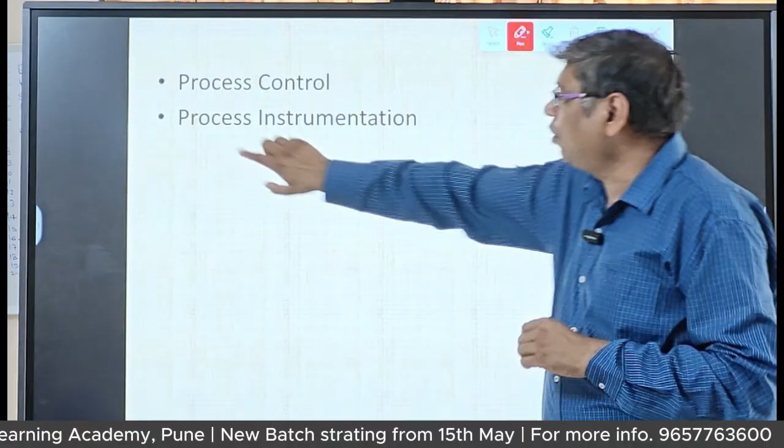Now, important point. This slide is very important because instrumentation has two parts. First, we will start from the process instrumentation.

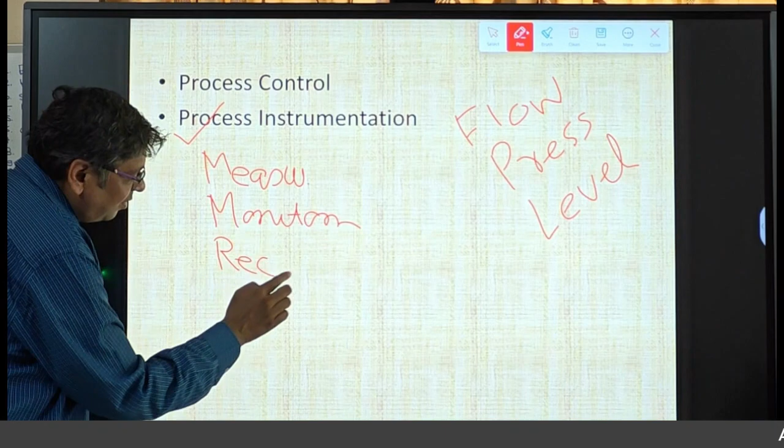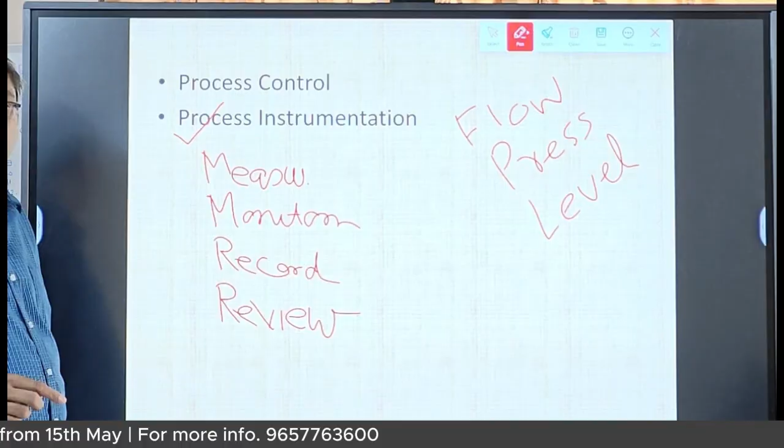Here in process instrumentation, you are measuring something, a particular parameter. Then you are monitoring it against its limits. Then you are recording and reviewing them, whether they are good or bad. You can also check their validity. This validity word is very important when you are in the calibration or audit field.

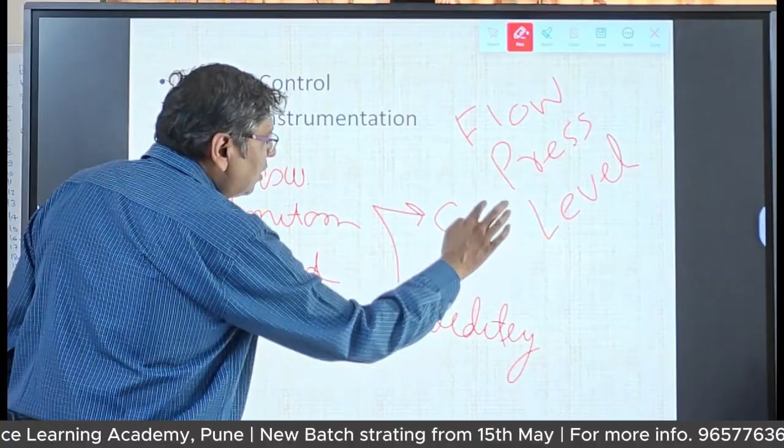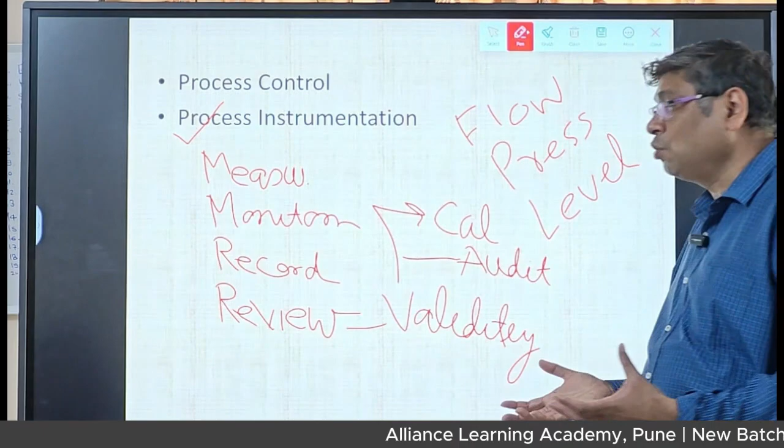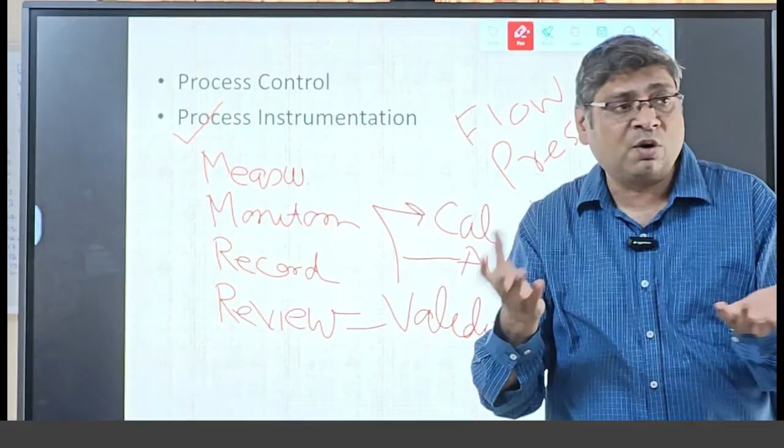Or nowadays you are becoming SCADA engineers. SCADA engineers must know whether the data coming in is right or wrong, or if it's garbage in, garbage out. If the instrumentation engineer, SCADA engineer, or PLC engineer is not able to understand whether the incoming data is right or wrong, their programming and everything will provide output that is garbage. No use, got it? So instrumentation deals with instruments.

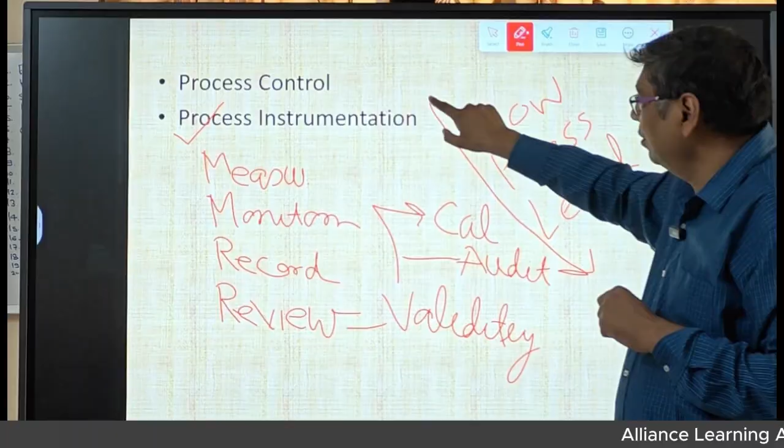Can you tell me at least 15 parameters today? First is flow, temperature. Third, pressure, very good, level. Okay, vibration, turbidity, density, velocity.

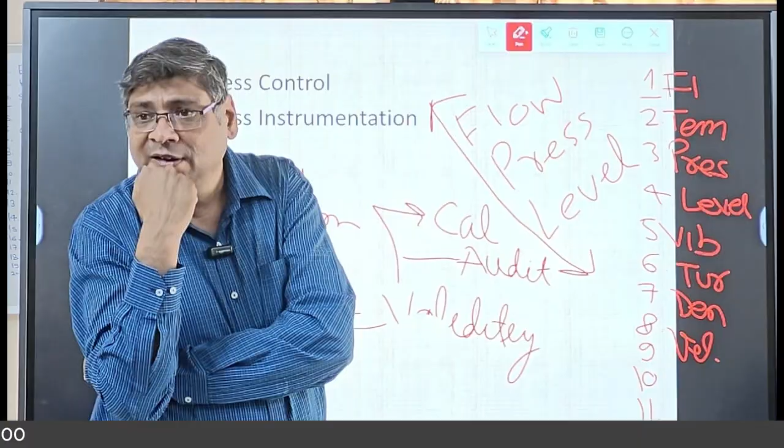pH, we can say pH. How much is the pH of water? Drinking water, what is the pH of drinking water? I think 7. You don't think 7, it is 7. So pH.

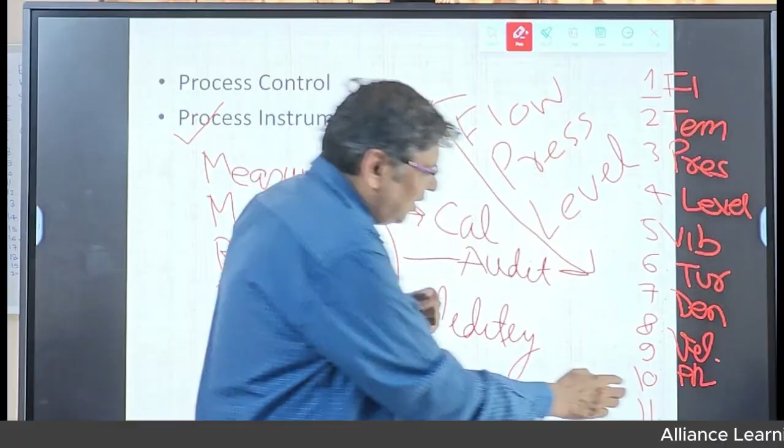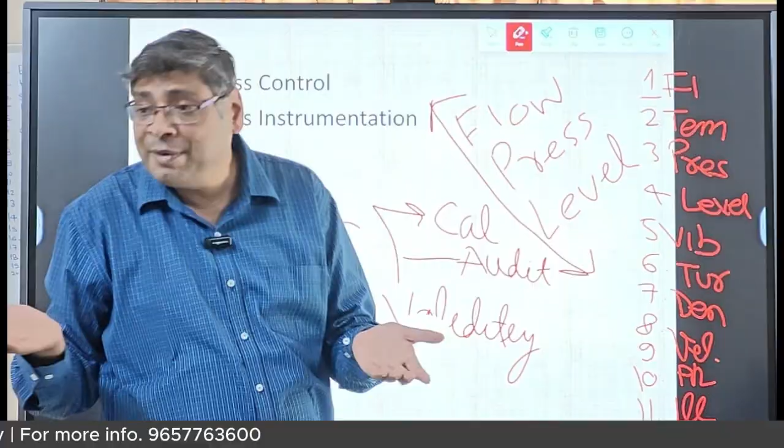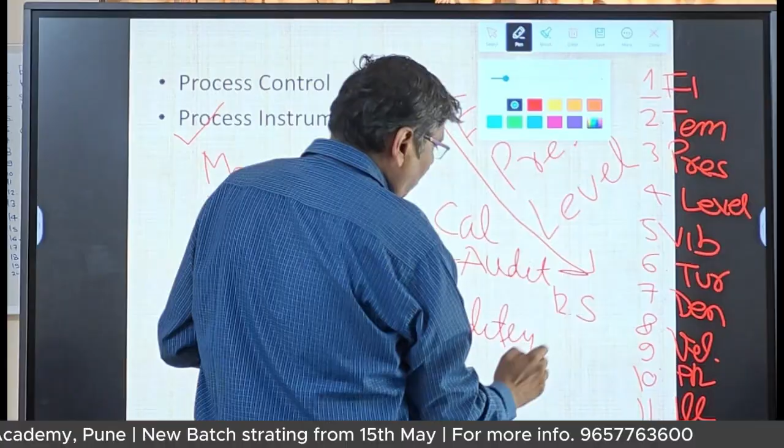Then what more? You can measure light also, luminous. Then when you see the word, something is coming on your screen, sound, dB, 120 dB. So you can say the 12th parameter is sound. I will just change the color so you will understand. Okay, what is 13? Sound.

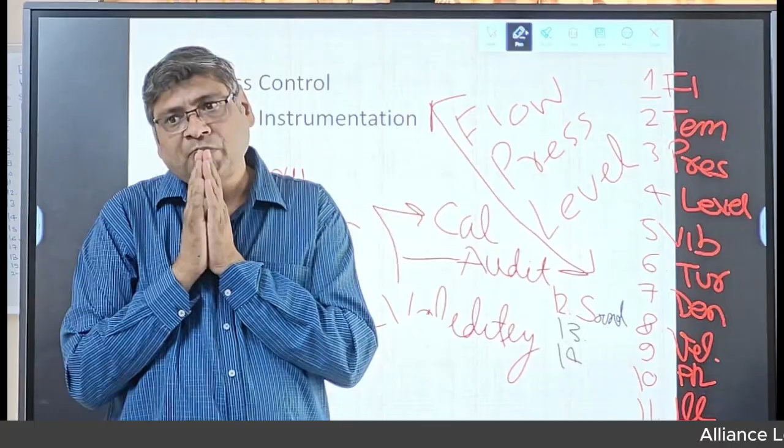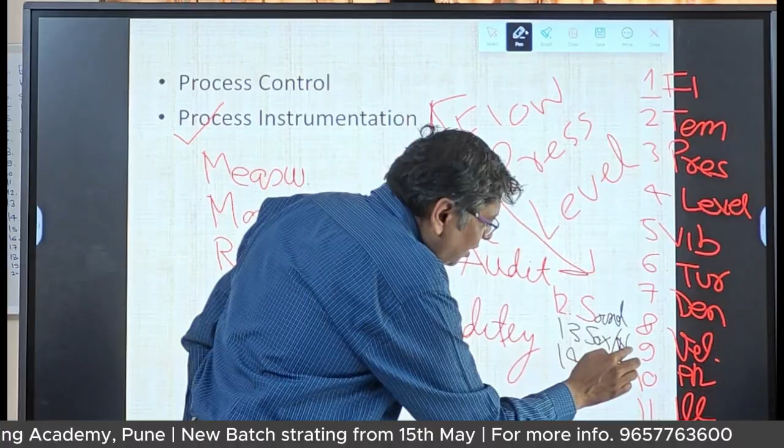These are SOx, NOx. That's the opacity, meaning how much dust is in your air. So we can say here SOx and NOx, and we can have opacity. Similarly, we say turbidity in water - how much haziness in the water is the turbidity. How much dust particle in the air is the opacity. Good air quality.

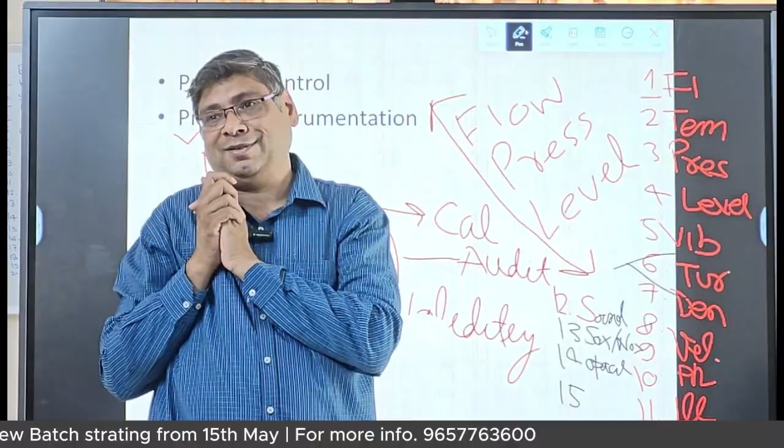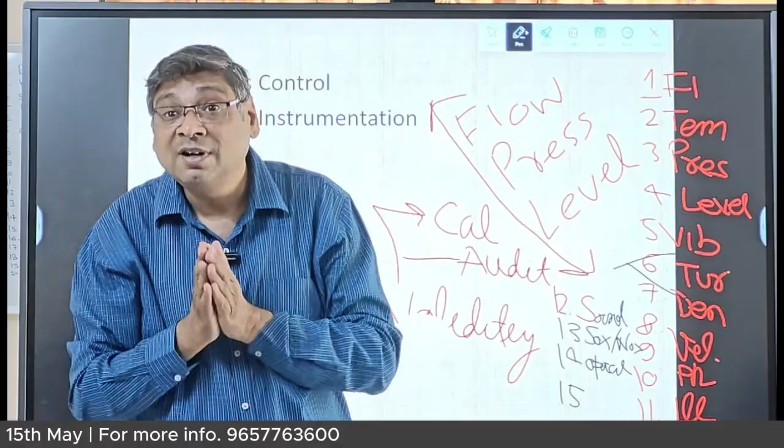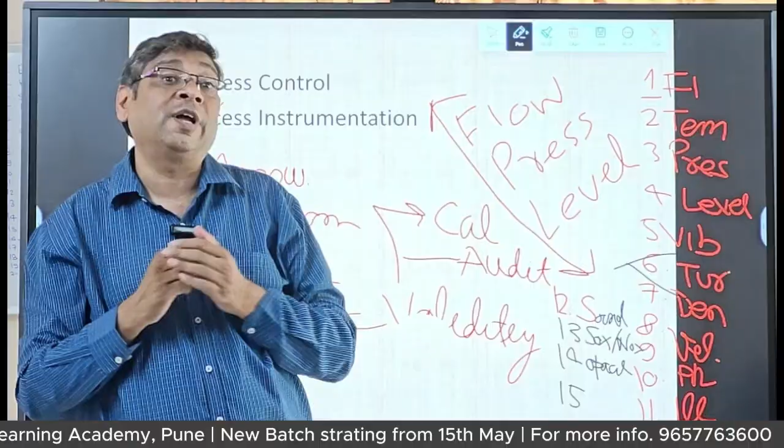Next time when you go to the roads, in the industries they have a board. That board displays how much SOx, how much NOx. In that company you can see. Nowadays they say that the pollution control board, CPCB Central Pollution Control Board, and SPCB State Pollution Control Board require you to display what is the air quality at your plant, how much wastewater, and the quality of wastewater.

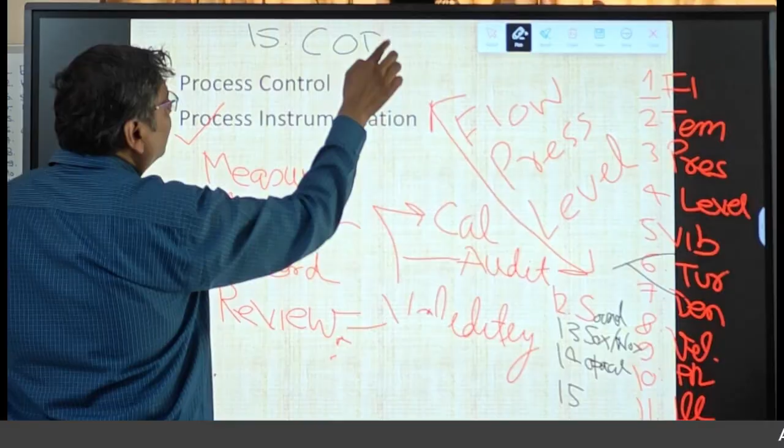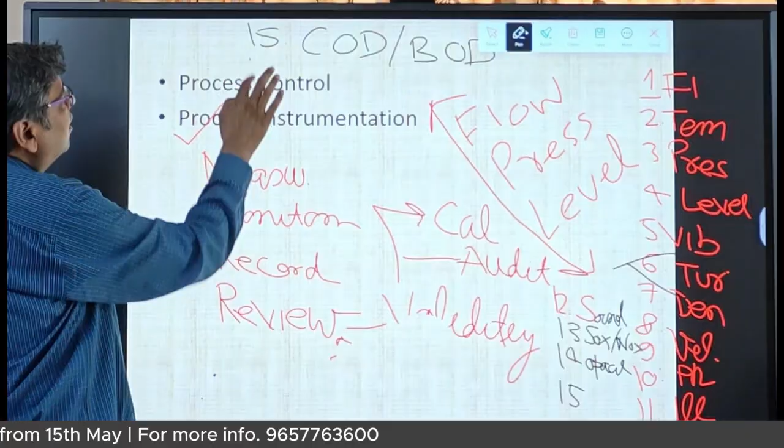Now quality of the wastewater, like air quality, has a lot of parameters. Parameter number 15 is COD, BOD - chemical oxygen demand and biological oxygen demand. Then TSS, total suspended solids. There are some more instruments, they call it 17, VOC.

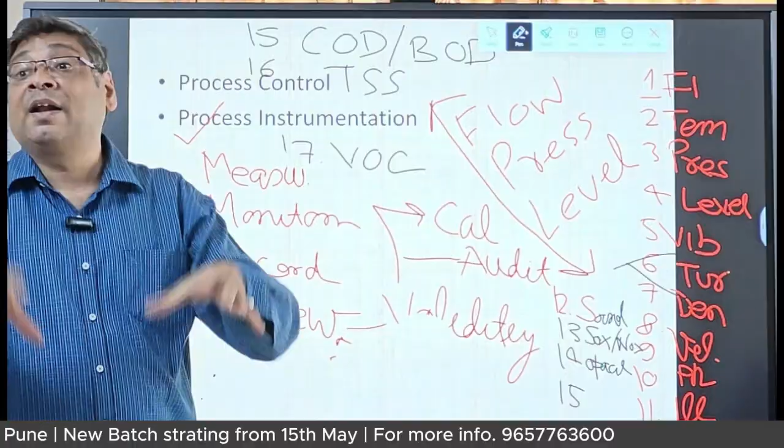Volatile compounds. And if my industry is like, for example, dealing with some metals, heavy metals, then they measure iron in the water, grease in the water. So that we also measure. There's a lot of good parameters you came up with for air quality and water quality.

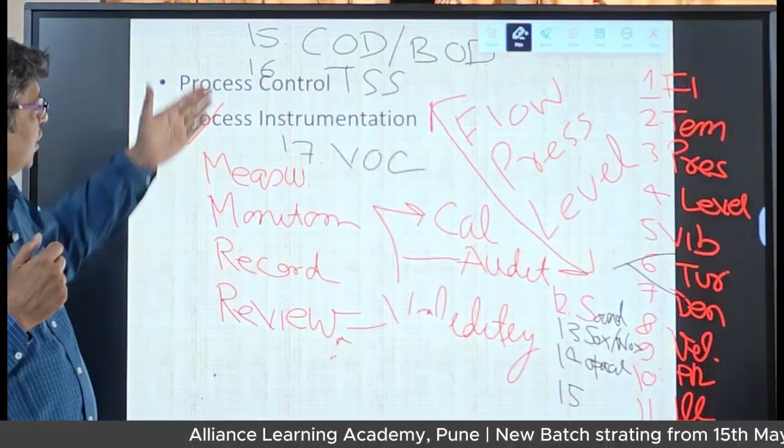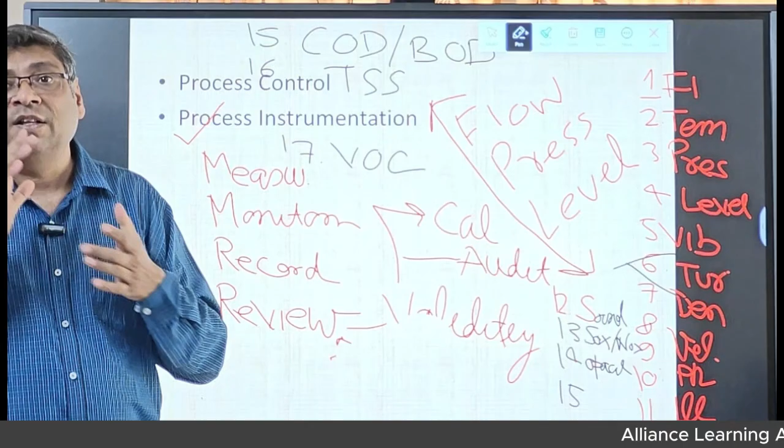So now how many is there? 16, 17. But we want to discuss only. So you can, if you want, take a photograph, or we will try to give you some notes on this. And weekly exams are based on these.

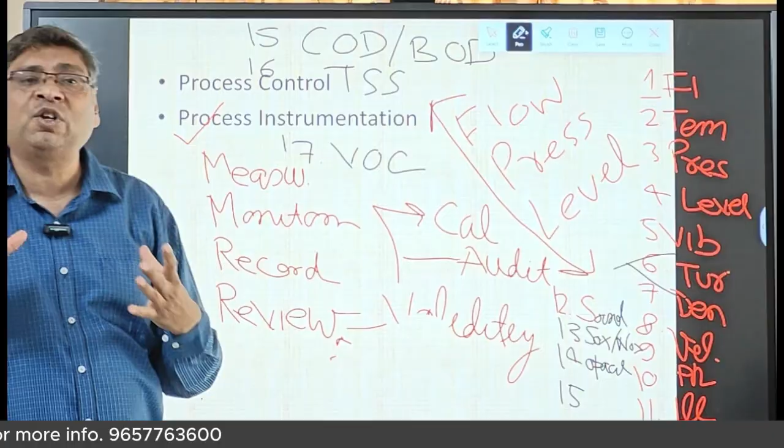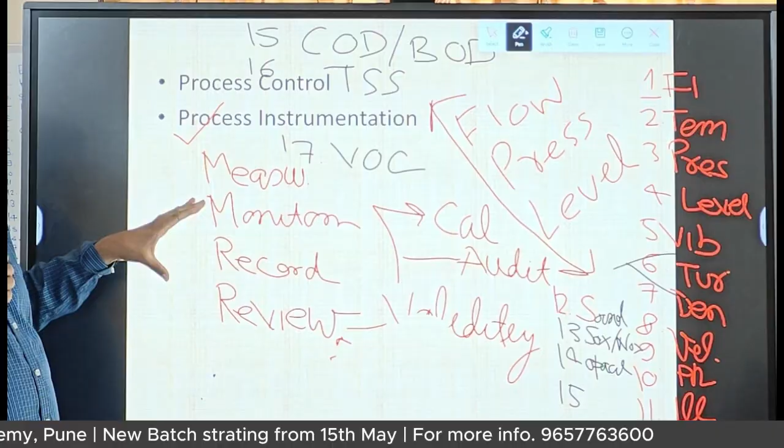So now we discussed process instrumentation. Why process instrumentation? Because we want to measure something, we want to monitor something, we want to record something, we want to review something. For that I need instruments, and that's called the instrumentation parameters.

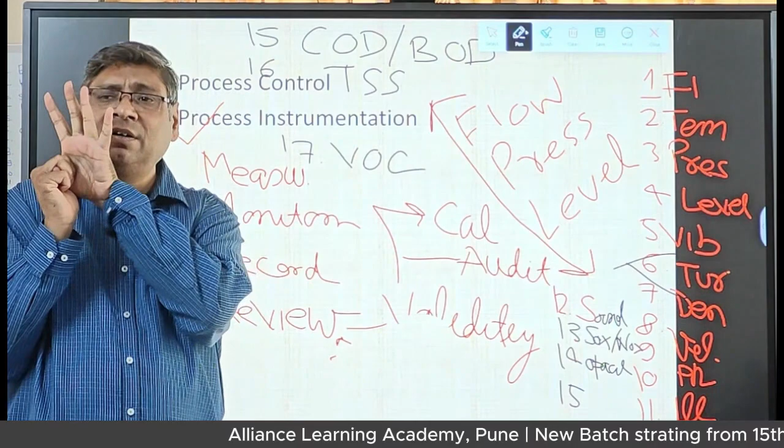Basic instrumentation parameters are how many? Basic four. And after that there are many. One day in one place, I think your college or something, they identified 75 parameters. Hello, 75 parameters! We are here on only 17.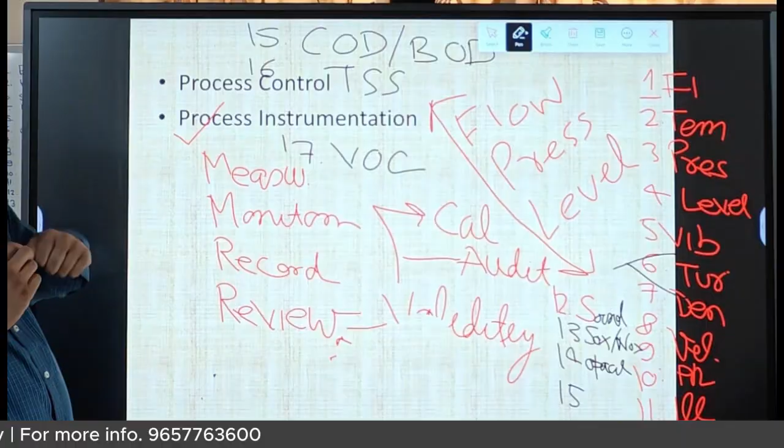Okay, now we are coming to the second part, and that part is the process control.

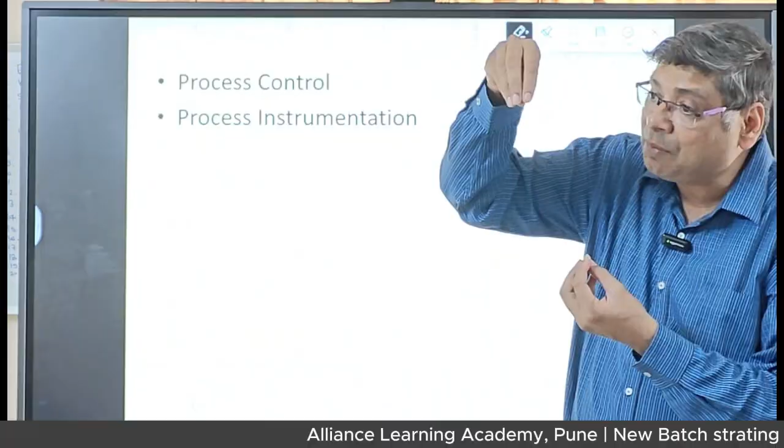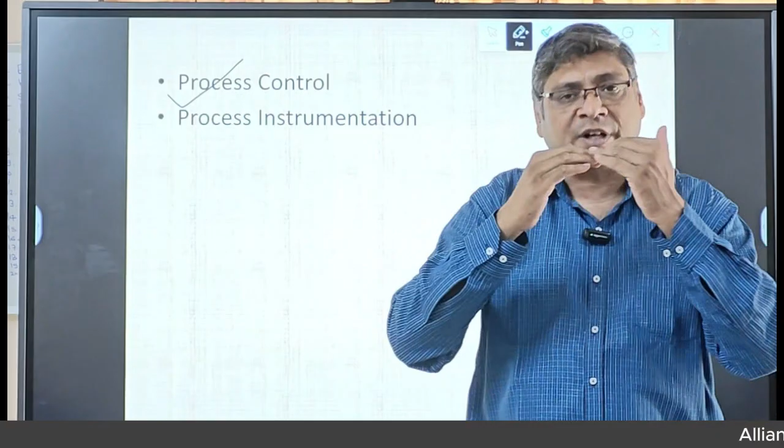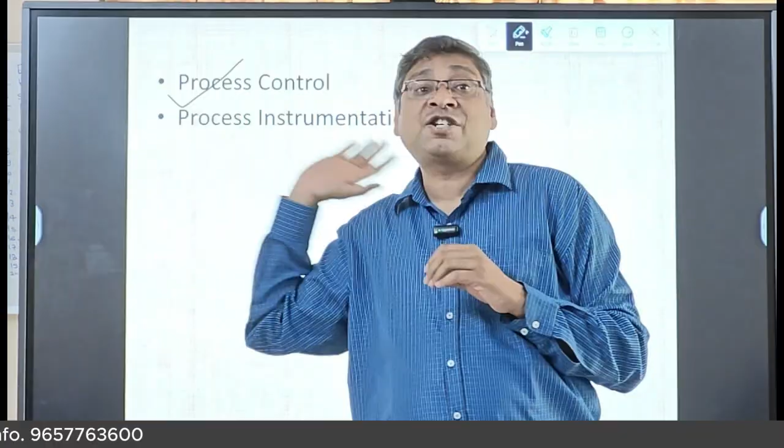Got it? So whatever things we do, this kind of things we do with the help of the parameters from the process control. So if someone will ask what is instrumentation, then you tell them there are two parts of instrumentation. One is PI and another is PC. In PI we studied about the instrumentation parameters. We gather the information, and by process control I use that parameter for any action. So here the word controller comes in.

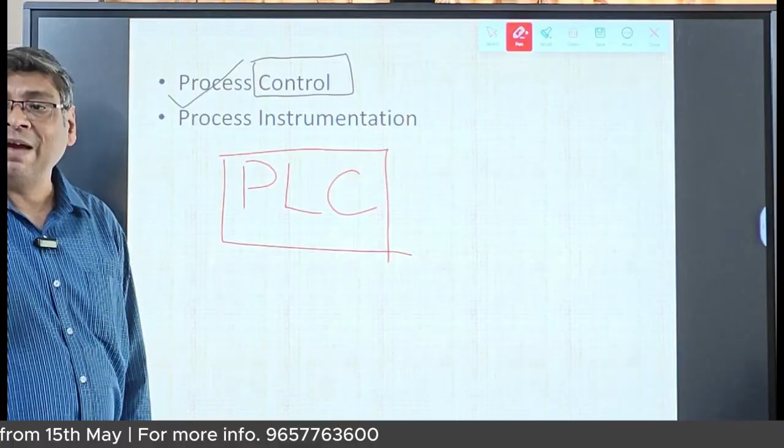Okay, so if you talk about the PLC, what am I doing? It is the PLC. In the PLC, first I am using the PI. PI are the 5 senses of PLC - eyes, nose, ear.

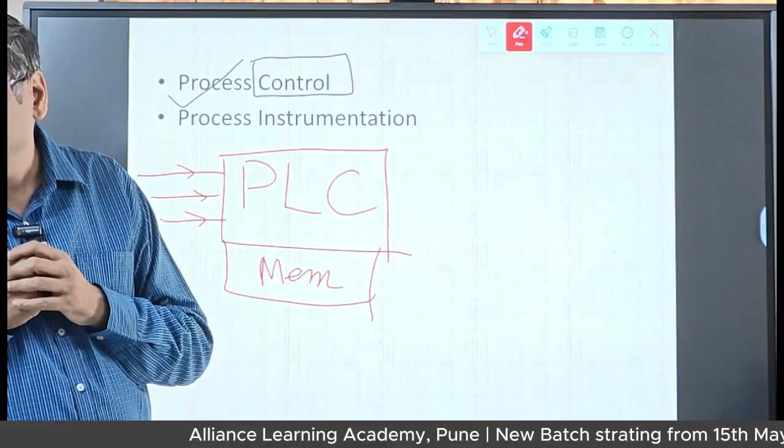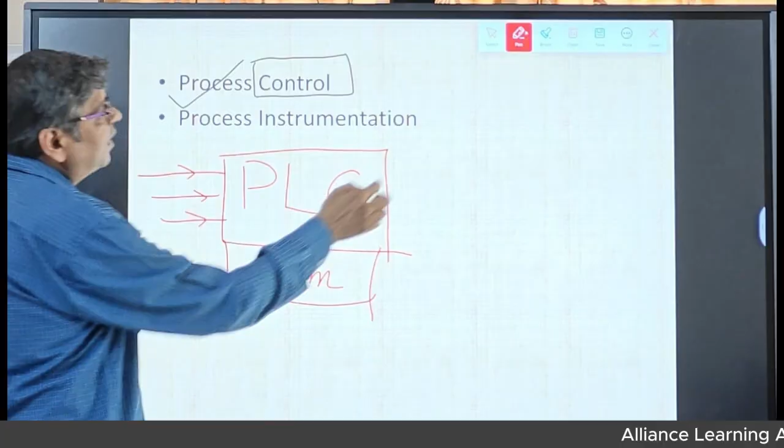So even today I'm scared of boys wearing red clothes that they might steal my purse. So it has its own old memory. Based on that, what does it do? It gives the outputs. So this is the input, this is the output.

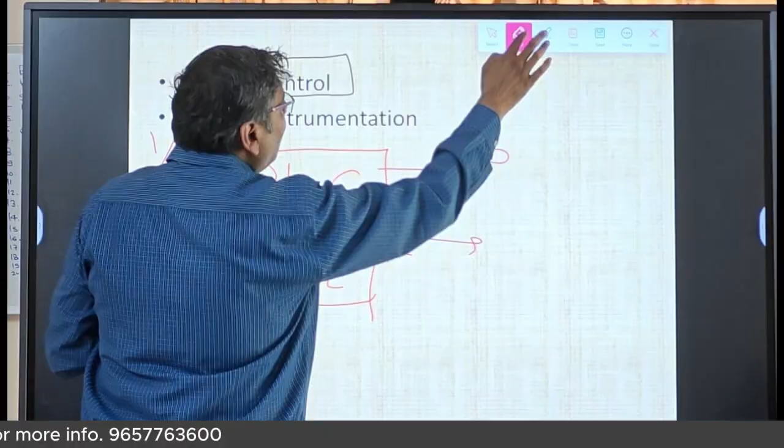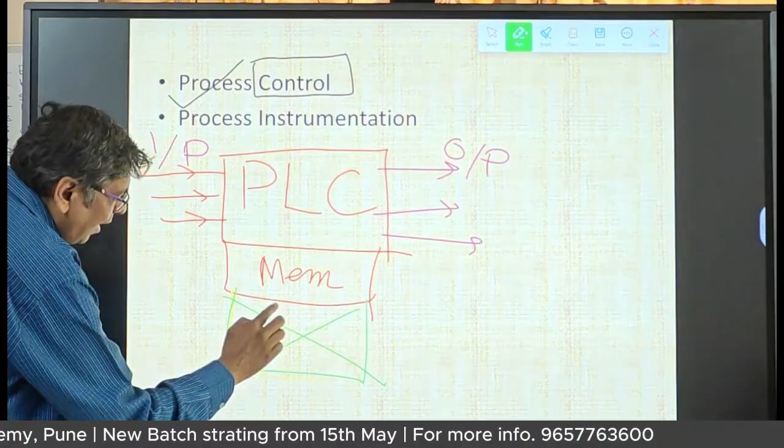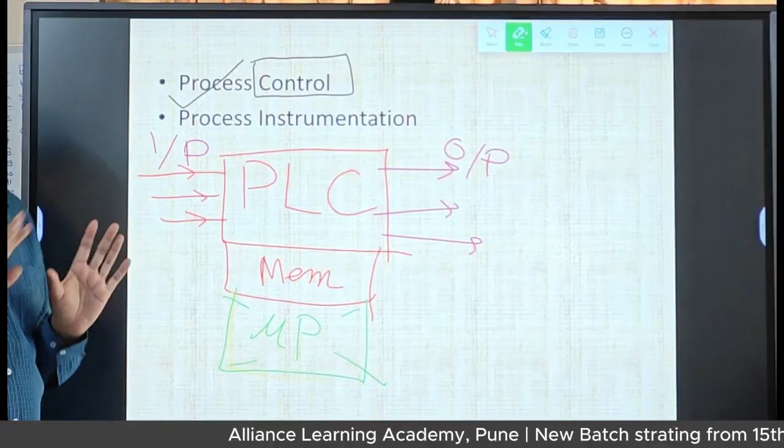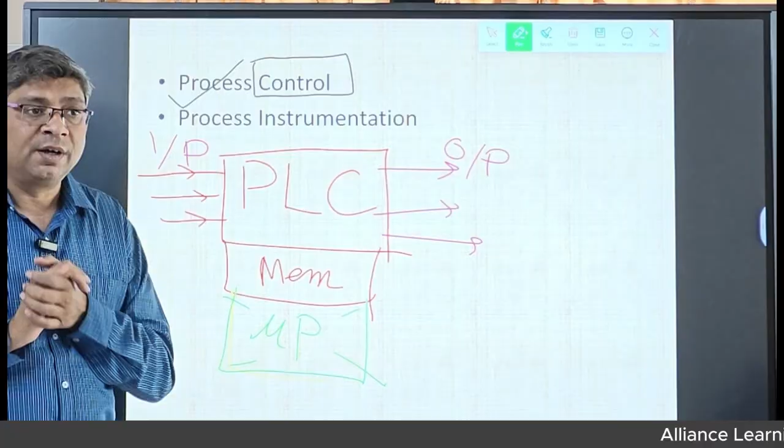How is it giving the output? With the memory, it has the brain - there is a microprocessor, and there are many other things also. So what is it doing? It is also recording, it is also giving the display, it is also controlling. It is turning something on or off based on the set points. So all these things your PLC is doing.

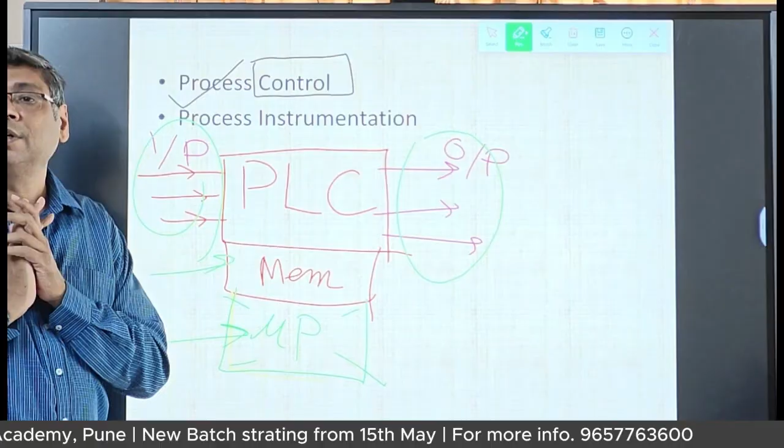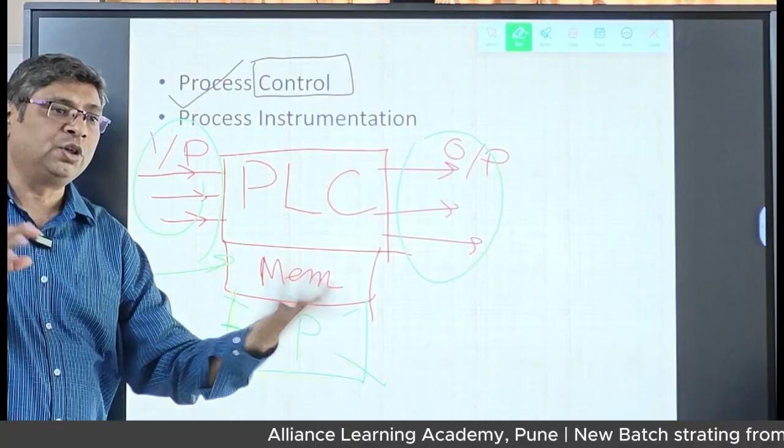When we come to the PLC, we will discuss one by one what are the inputs, outputs, what are the memories, how this microprocessor works, how we program in the memory. So we have a control philosophy, and that we make into a program, and based on that program, by taking the input, it gives you output for switching on and off, and by that switching we can have many control actions.

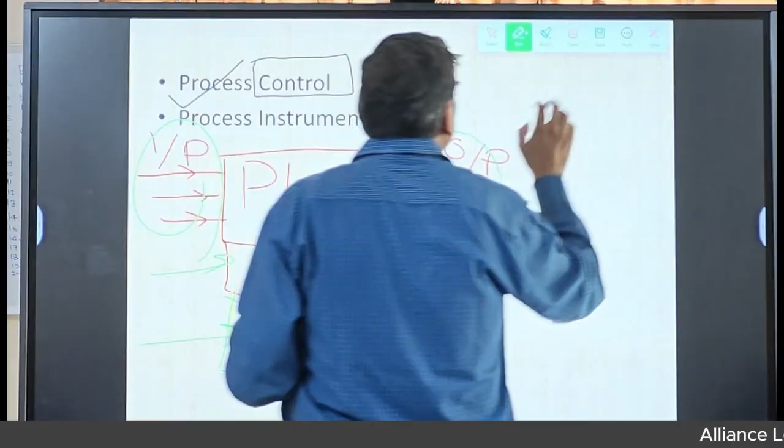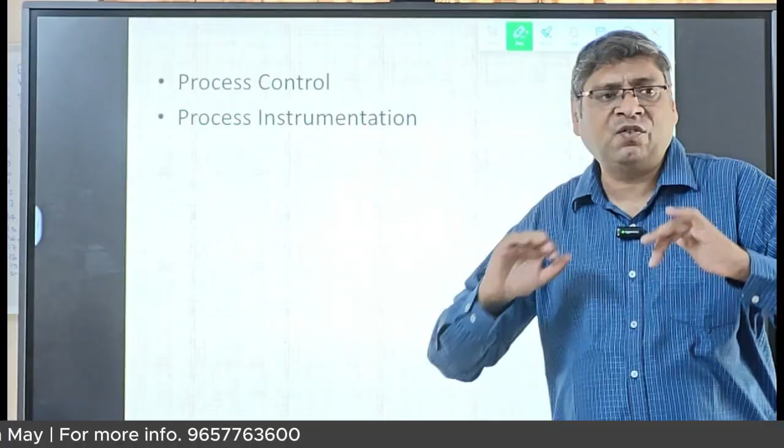Clear? If someone asks you what is PC, what is PI, can you give the answer? Yes or no? Is it clear? Because this is the basics. We are starting from the very bottom.

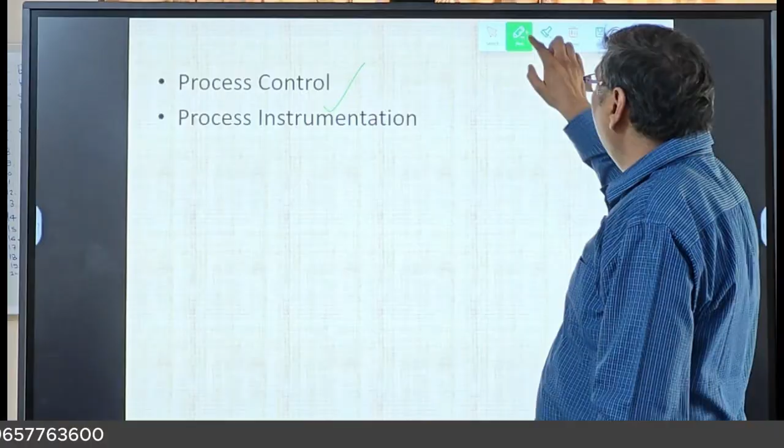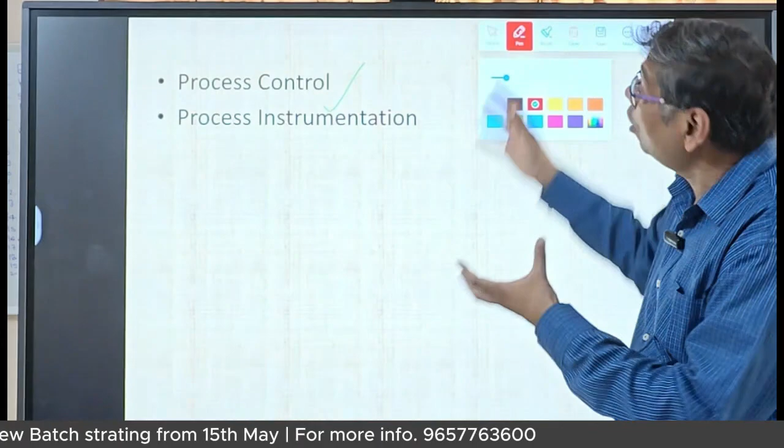Then you talk about the controls. So there are a lot of controls. Can you tell me some names of the controls which you studied? Tell me some names of controllers. Okay, temperature control - but I am not talking about this control, I am talking about controllers. What kind of controllers did you study? DCS, PLC - okay, I will write here DCS, PLC.

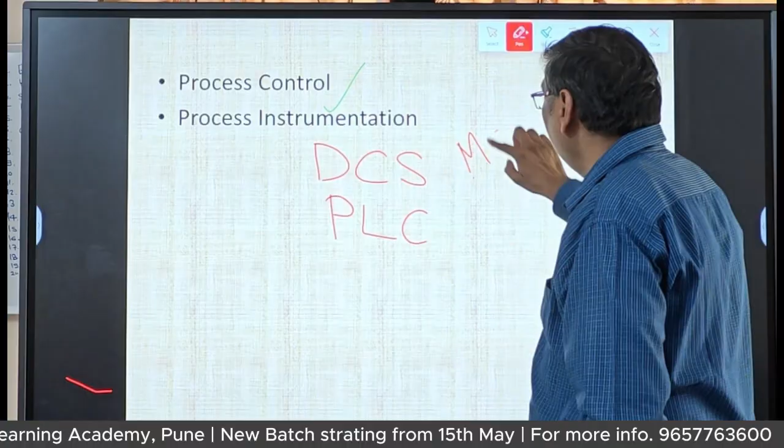These controllers may have a lot of different control strategies. What are they, I am interested to know. One I am giving you - one is the manual on off. That is the one - meaning, I felt cold, I turned it off. I feel a bit warm, turned on number 2, turned on number 3 and 4. That is the manual on off control.

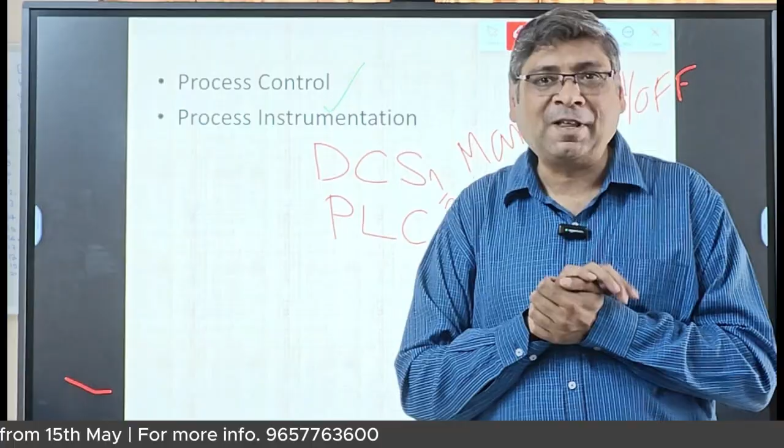What others? Automatic - let's go with automatic. So one is the manual, good, second is the automatic. Okay, then third controller - PI, PID. So third is the PID.

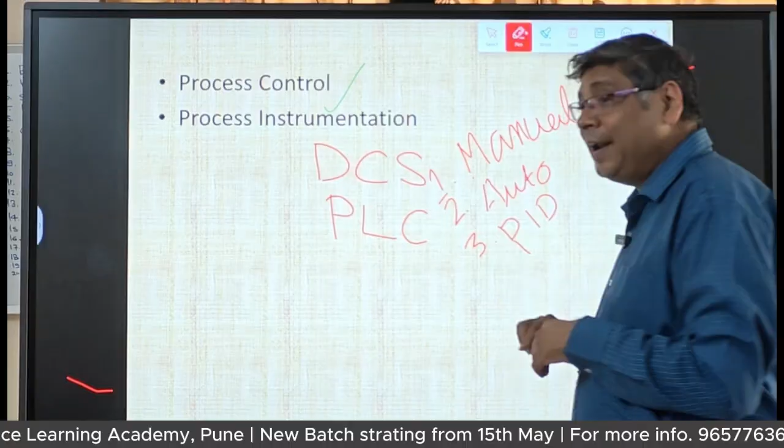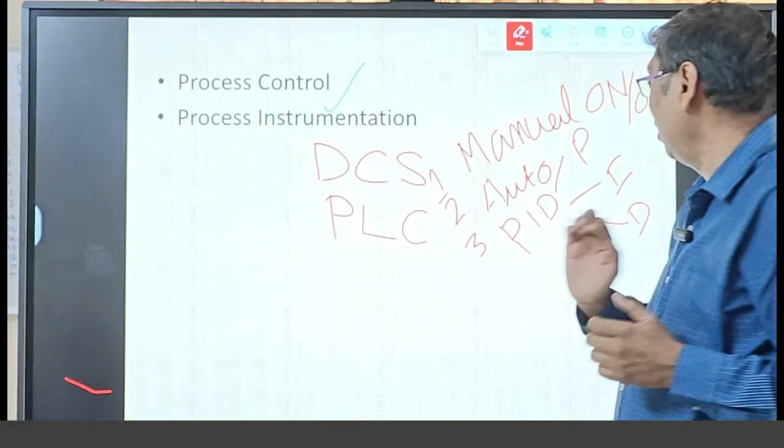So this PID, inside this PID there are a lot of things - what are they? In this there is a proportional, integral - but have you ever heard there is an integral controller alone? No, no. Is it a derivative controller alone? No, no. It's always a combination of these. So tell me the combinations - P, then PI, then PD, and PID.

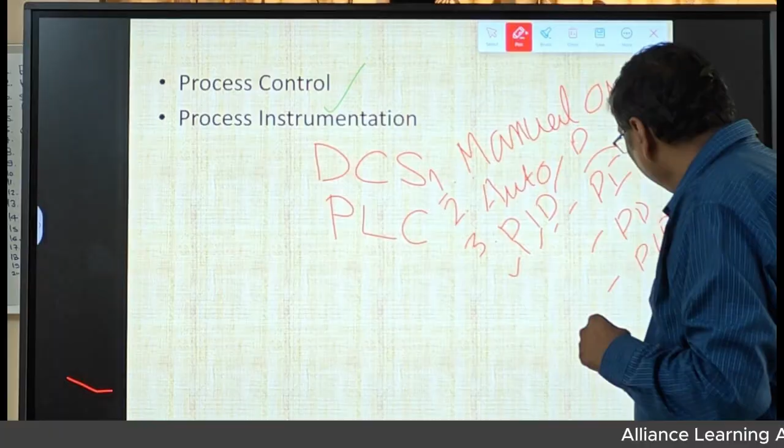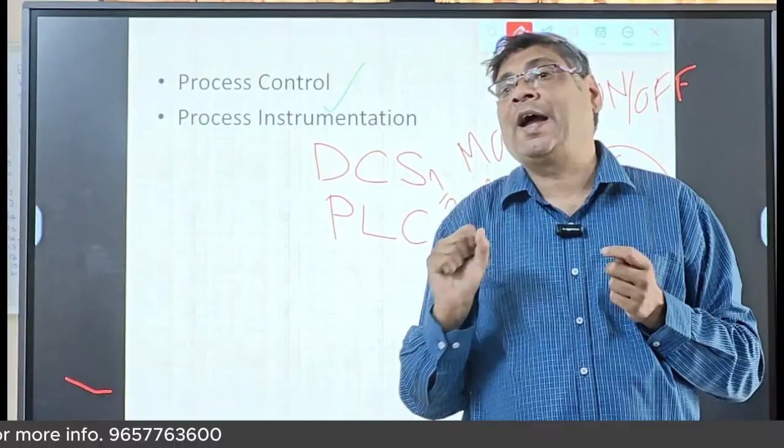Right? By changing these three - P, I, D - we have combinations of this. So when we go to the PID, we will also study this, and in the PLC there is a PID block, and with the PID we will check how that PID works. But that is advanced, when you're in the third month of this course, because then you will develop all these basic things, then you'll be able to grasp it.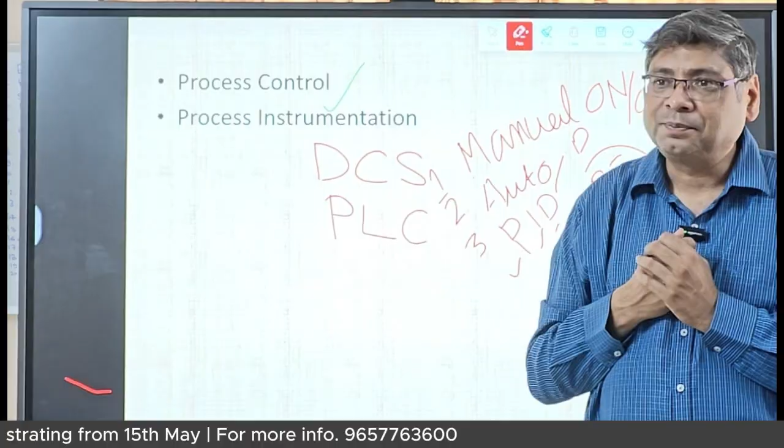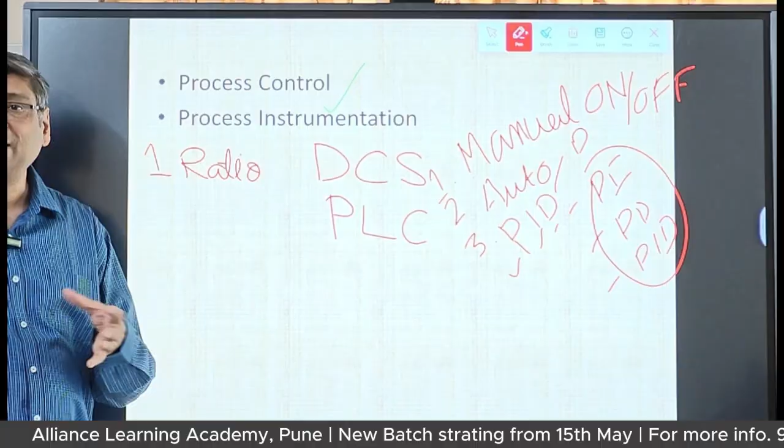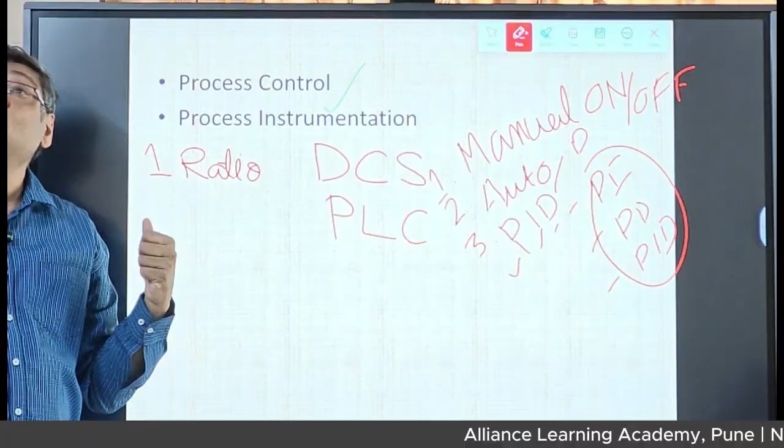Now you tell me these are the controllers. What are different control schemes? One is on-off. What are different control schemes - I am giving you an example. One is the ratio - your controller is working in a ratio. Example is your cold drink - the taste, the water and other things are in some ratio. Then your paints, the color of paint is in a ratio. In the food industry, you drink different kinds of fruit juices and all are ratios.

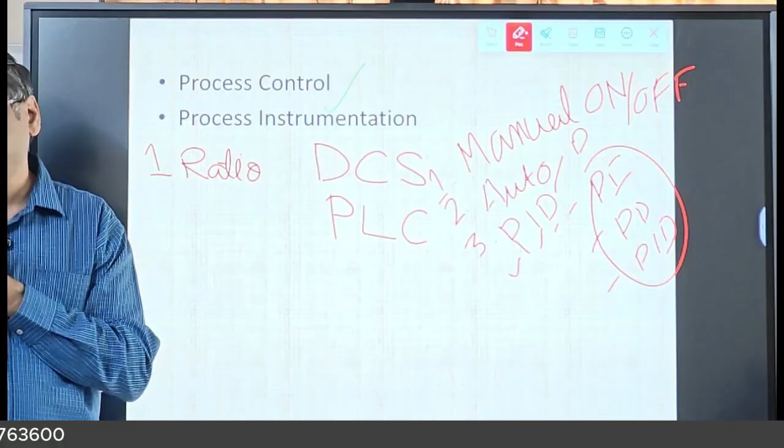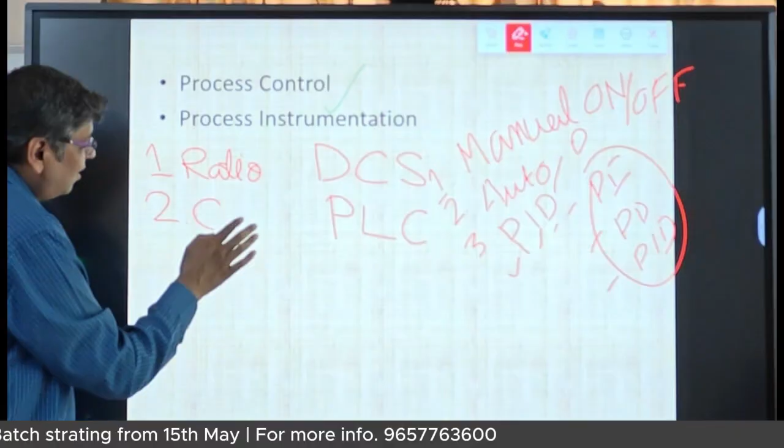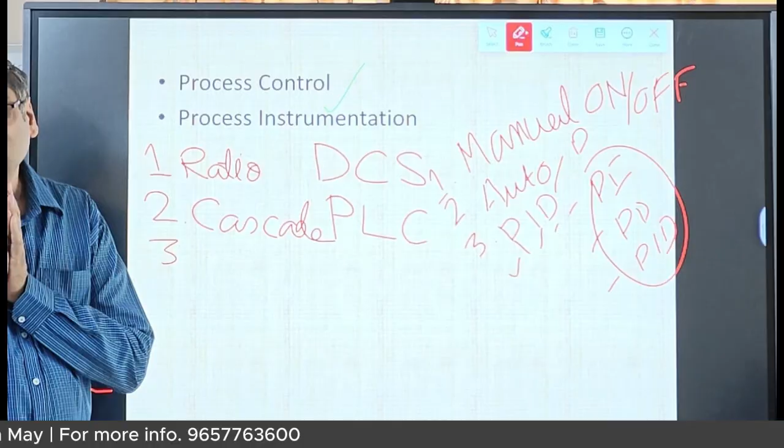Then second one, after ratio, there is cascade. And then third, tell me - feed forward. Did you study this? Yes. So these are important, you need to remember this now - feed forward and more.

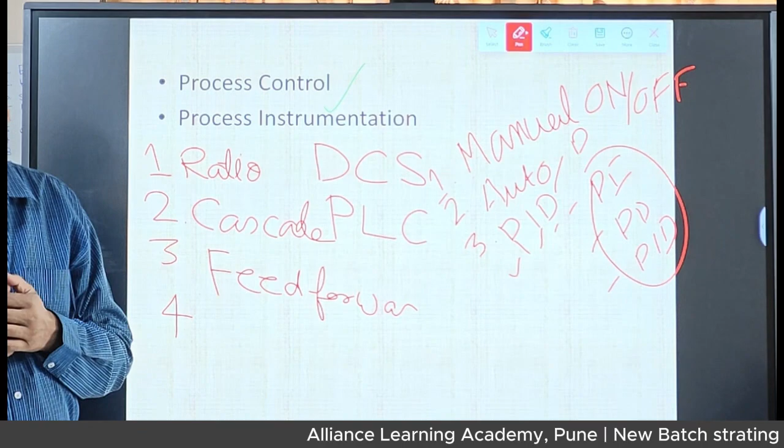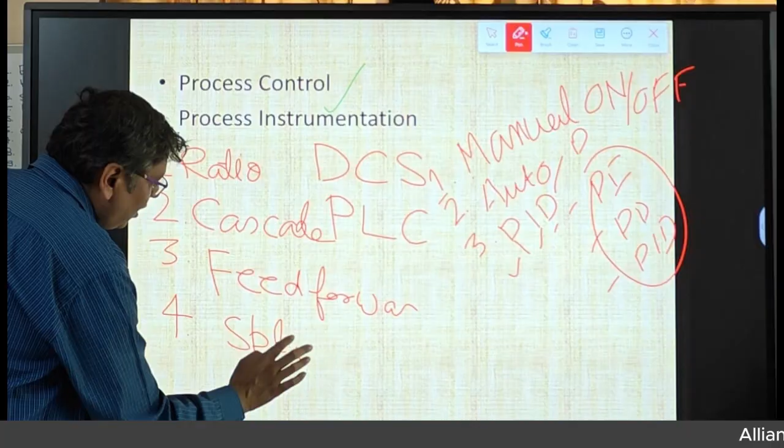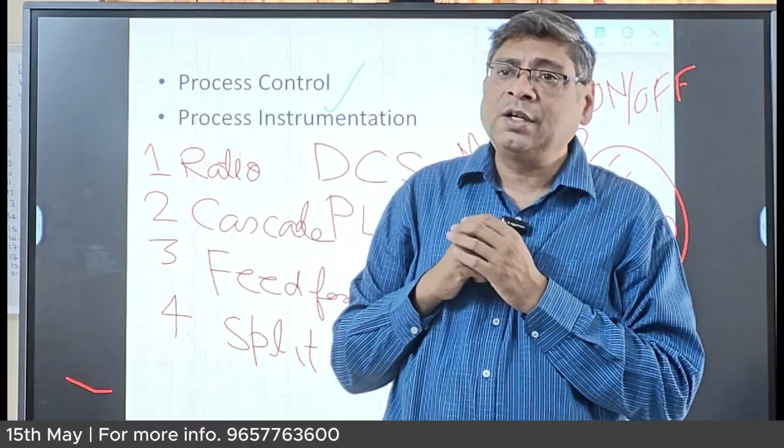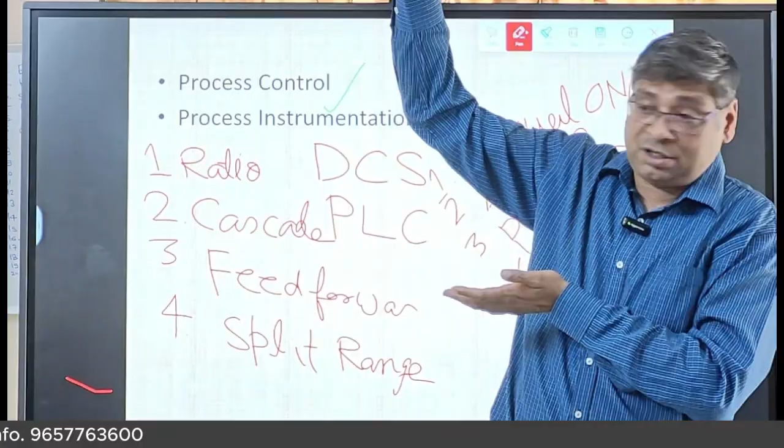I have a steam plant or an oxygen plant. So sometimes they are providing steam or oxygen to some other plant. Sometimes that plant needs less oxygen or steam, but sometimes at full capacity it needs a lot of steam or oxygen. I'm giving an example of these two parameters right now. So we have one small valve and one bigger valve. Sometimes they work in a split - say 30% open, 40% open, and together they complete the demand. Sometimes both are at 100%.